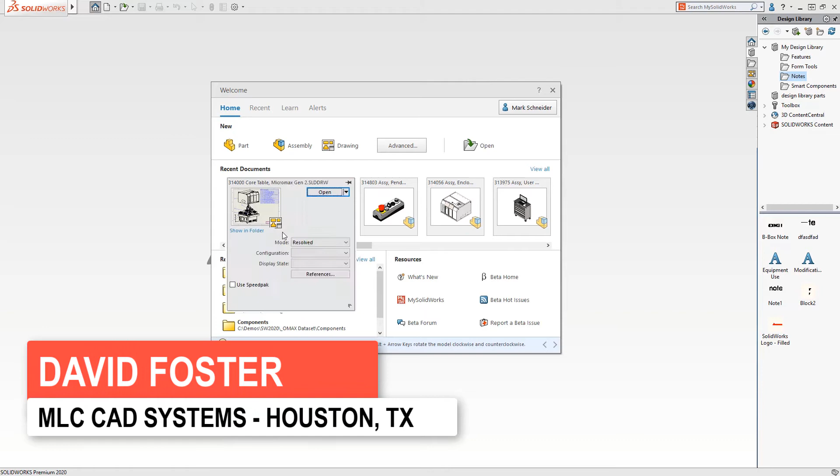Performance is always a major focus for the SOLIDWORKS development team, and this year is no different. With detailing mode in SOLIDWORKS 2020, you can now open massive drawings in seconds, regardless of their size or complexity. The model does not get loaded, but the drawing views are intact, so there's no loss of detail.

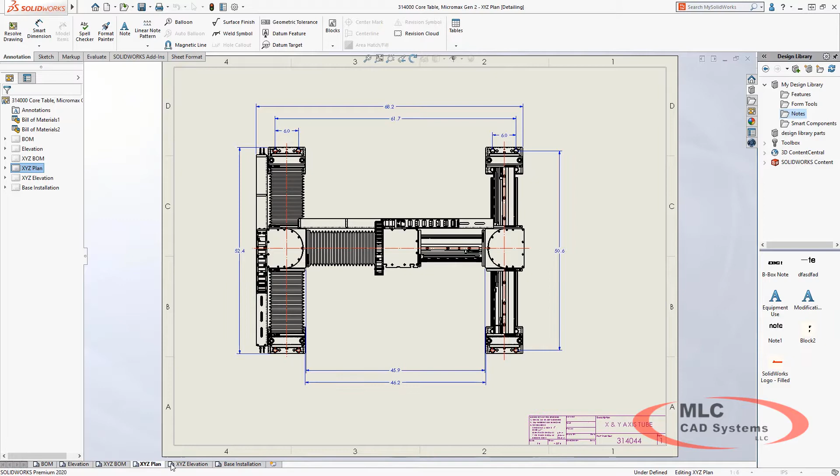Detailing mode is perfect for quickly opening drawings for minor edits or design reviews. Individual sheets load in an instant, and the drawing can also be printed. But it doesn't stop there. Some editing capabilities are also available, such as making changes to annotations or dimensions.

Notes can be added to the drawing or dragged from a library of company notes, and annotations added in detailing mode can also be edited. In this case, we can add line numbers and formatting to the note.

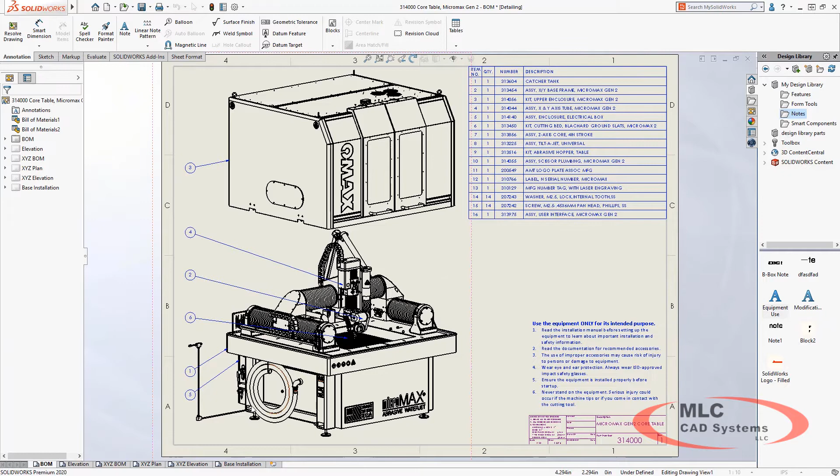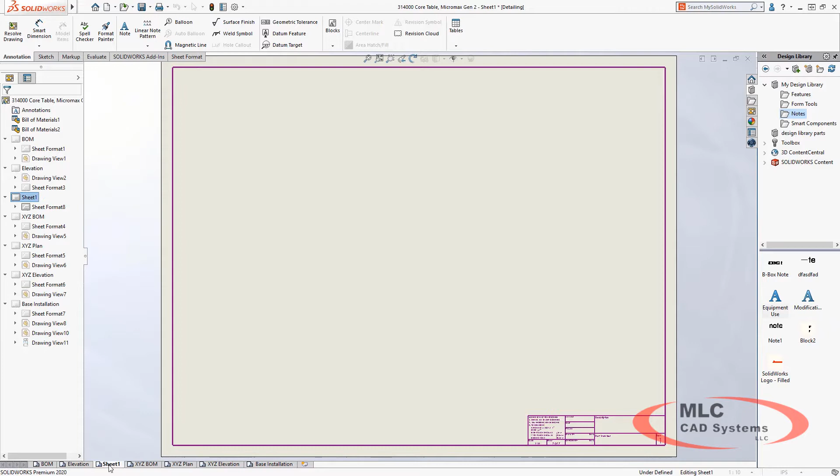This drawing sheet is a bit crowded, and as with a resolved drawing, views can be moved and arranged on the drawing. Dimensions can also be positioned to achieve the desired layout. Views can also be cut, copied, and pasted. And to better organize this drawing, we'll add a new sheet, reposition the tab, and paste the view onto this sheet and do some dimension cleanup.

Balloons can be added or repositioned, taking advantage of magnetic lines for a really clean look. If additional dimensioning is required, this can also be done in detailing mode, and dimensions can be added to edges and vertices, using the same techniques you're familiar with in resolved drawings. In this case, we'll add some dimensions to locate the positioning of the holes for our gantry system.

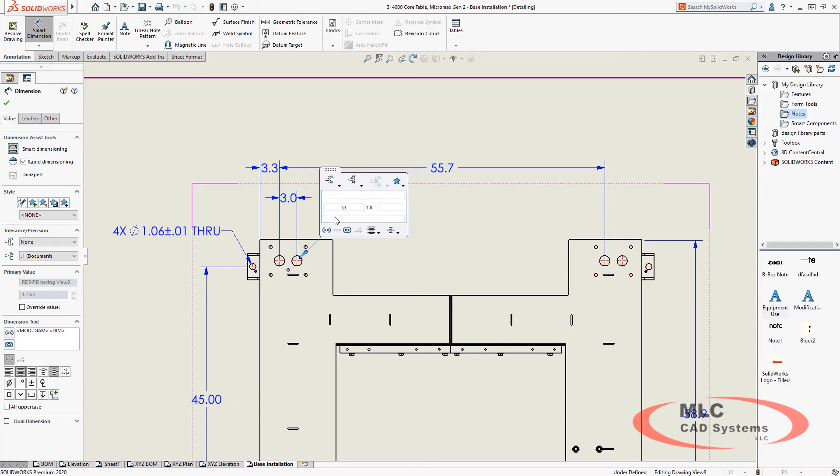We'll also define the hole size, and you can see the dimension palette is available to fine-tune your dimension with notes, tolerances, or the dimension property manager can be used for more refinement. Any command that is not grayed out on the command manager is available in detailing mode, such as the format painter. Here we'll leverage the existing dimension and format painter to paint its format to our new dimensions and arrange our dimensions for better clarity.

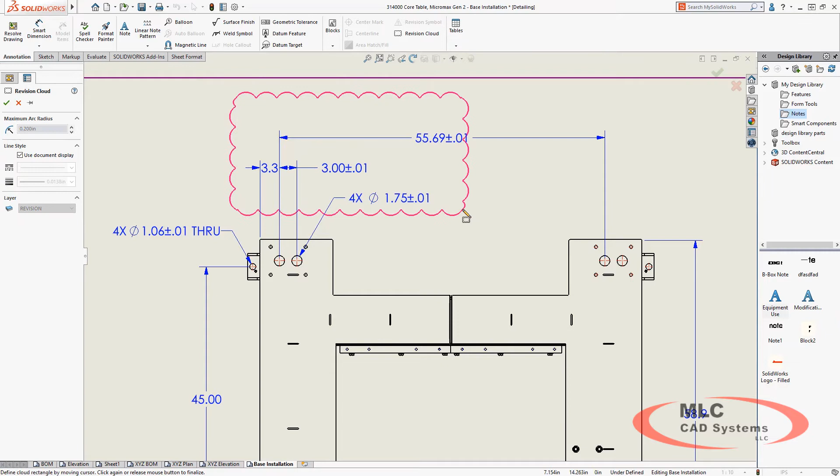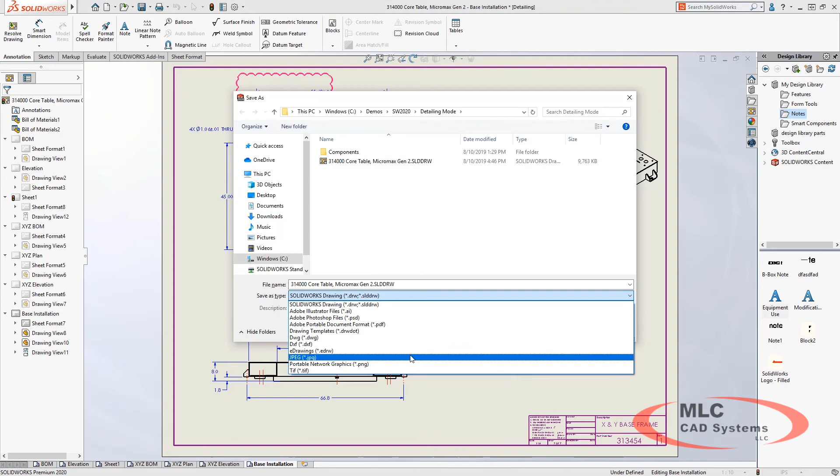Revision tables, symbols, and clouds can also be added to communicate any changes. And when you're done with all your edits, the drawing can be saved, and rest assured that these edits will be there regardless of which mode the drawing is opened in next. To communicate with external collaborators, you can print out the drawing, or you can save the drawing in a variety of formats such as DWG, JPEG, or even PDF.

With detailing mode in SOLIDWORKS 2020, productivity is enhanced by allowing users to open in seconds drawings containing large assemblies with lots of sheets or many configurations and resource-intensive views.